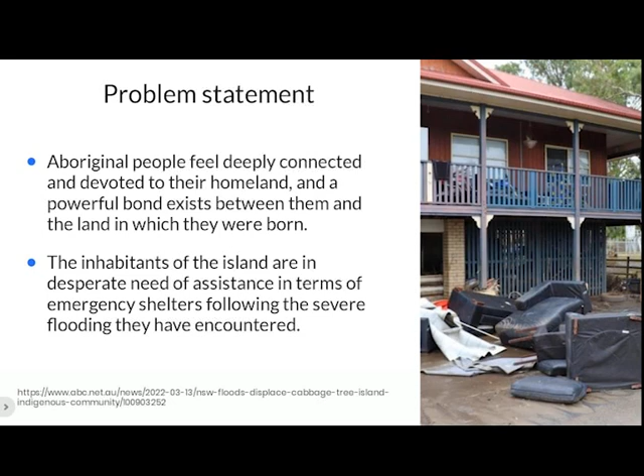Then we talk about the problem statement. First of all, the Aboriginal people have deep feeling for their homeland and are unwilling to leave it easily. Then after the flood, residents' needs for housing are the priority. This is what I want to solve by design.

Let's move on to the next page. I want to talk about frameworks. Using theoretical frameworks such as disaster risk reduction and the social-ecological system, along with methodologies such as

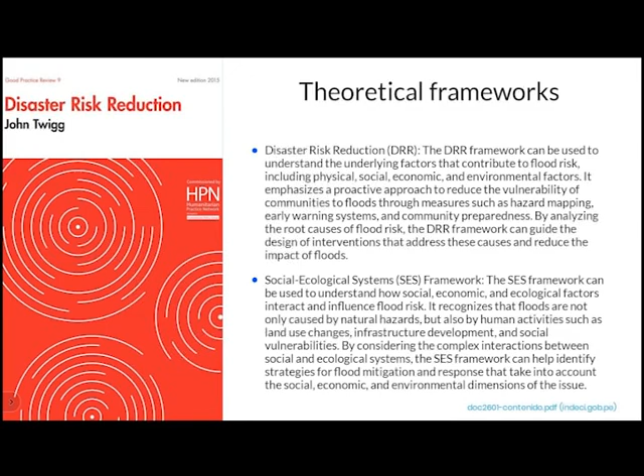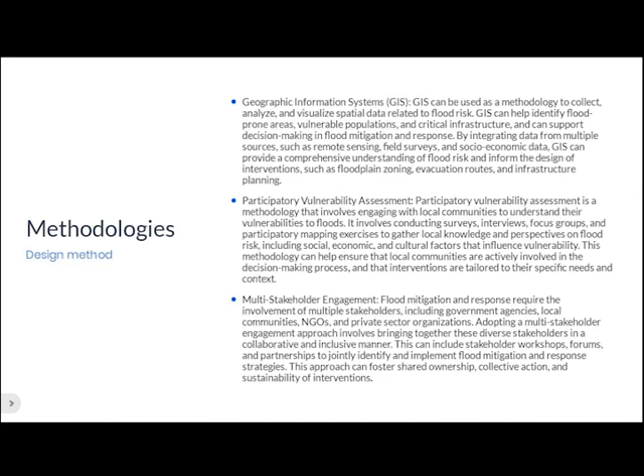geographic information systems (GIS), participatory vulnerability assessment, and multi-stakeholder engagement, can provide a comprehensive and inclusive approach to designing a solution for flood mitigation and response.

Humanihut is an established company that provides shelters in containers. Their projects are complete and well equipped for comfortable living, but there are also limitations.

First, the shelter may not be delivered to the disaster area immediately after the flood. Second, the container can only be used in relatively flat terrain. Third, the container is not suitable for flood-prone areas if it is close to the ground.

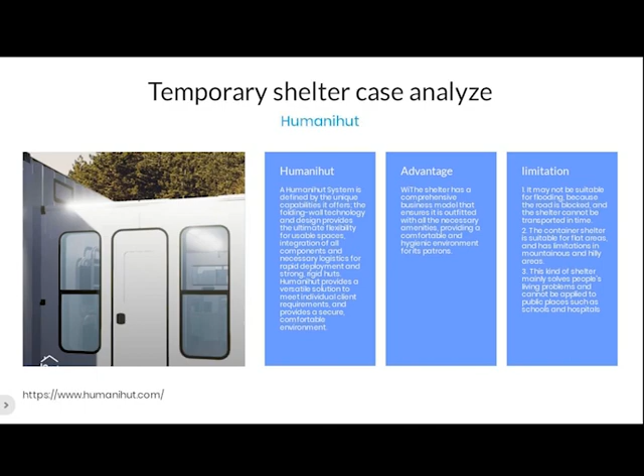Finally, the container shelter can only meet people's daily needs, and children in the disaster area hope to go to school as soon as possible. Let's move on to the next page.

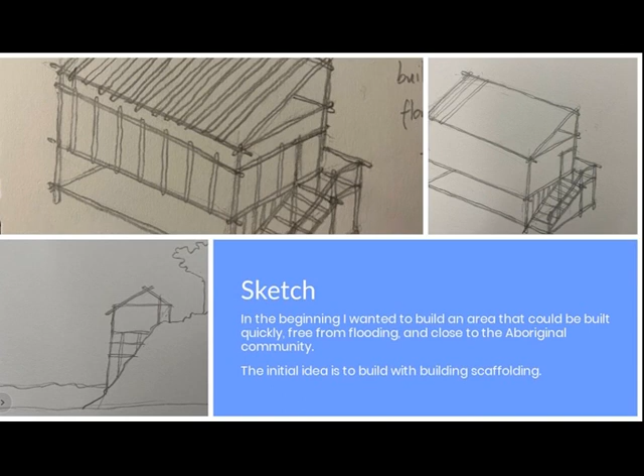In the beginning, I want to build an area that can be built quickly, free from flooding, and close to the Aboriginal community. The initial idea is to build with building scaffolding.

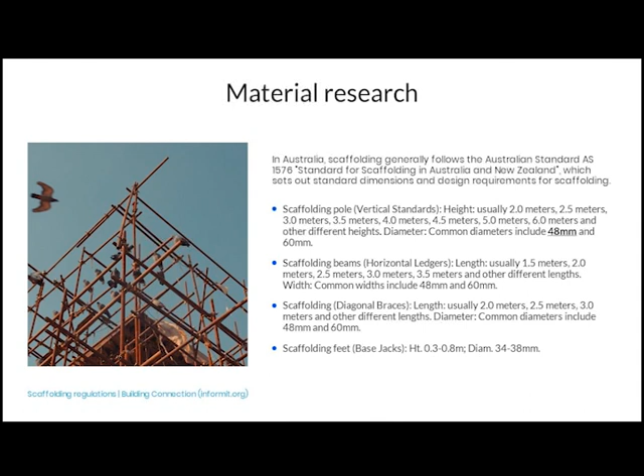Then I did some material research. According to the data, there are many kinds of specifications for building scaffolding. My idea is to minimize processing, saving money while being environmentally friendly.

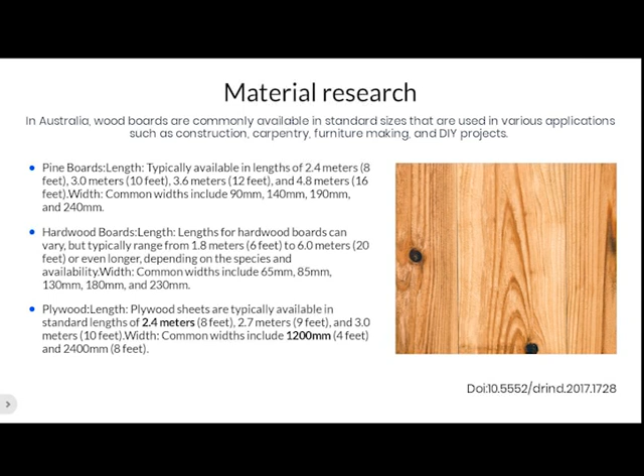In the same way, I investigated the standard size of some wooden boards and tried to use this material directly to avoid secondary processing. General scaffolding is easy to rust when stored for a long time.

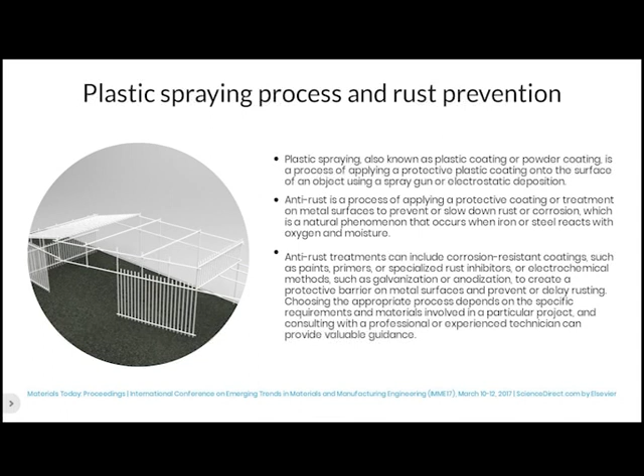So I investigated the plastic spraying process, which is more environmentally friendly and cost-effective than the electrolytic process. Therefore, the raw materials can be used after simple processing after purchase.

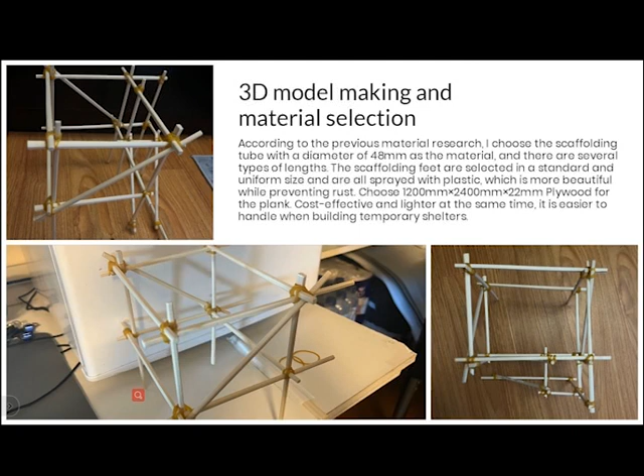After the material research, I made the 3D model and determined the size of the material used. I mainly consider the durability of the material, the comfort and environmental protection for people using it, followed by the cost issue. Then I made a further design and drew the blueprint of the shelter.

The reason why it looks like this is because the floods mostly happen in summer. I'm not worried about insulation, but more about dryness and ventilation.

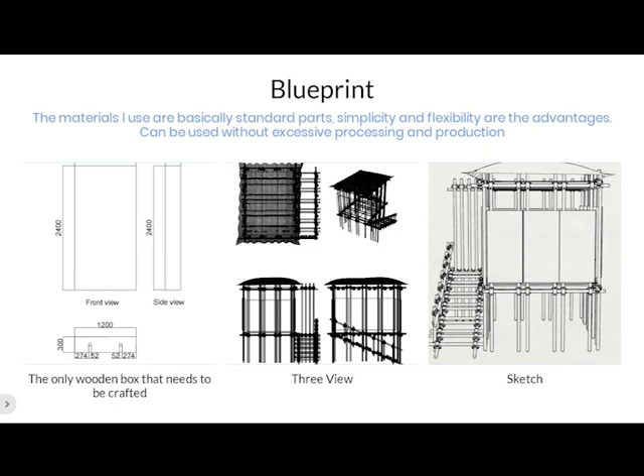The materials I used are basically standard parts. Flexibility is the advantage. The following is the assembly structure of my work, which is completely step by step, from simple parts, very simple and ingenious.

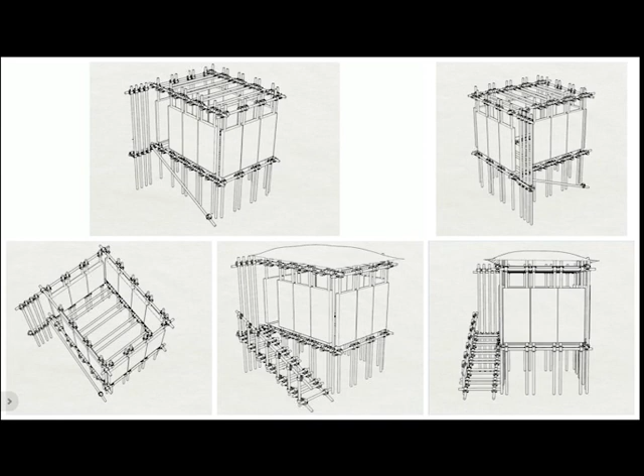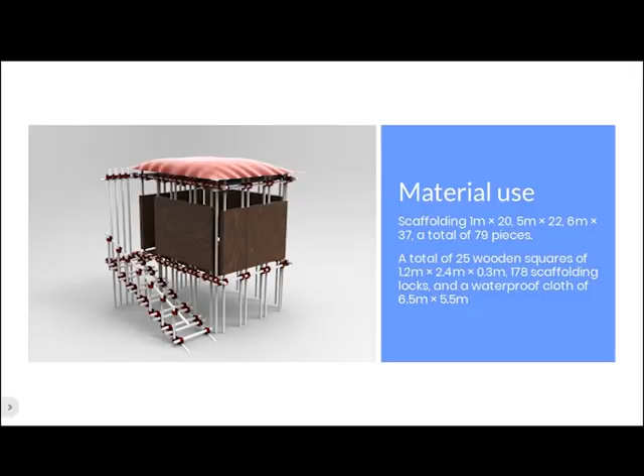The next page is the final rendering. I used a total of 79 scaffolding tubes, 25 wooden squares, and 178 scaffolding locks, and waterproof cloth. There are some different views and details of my work.

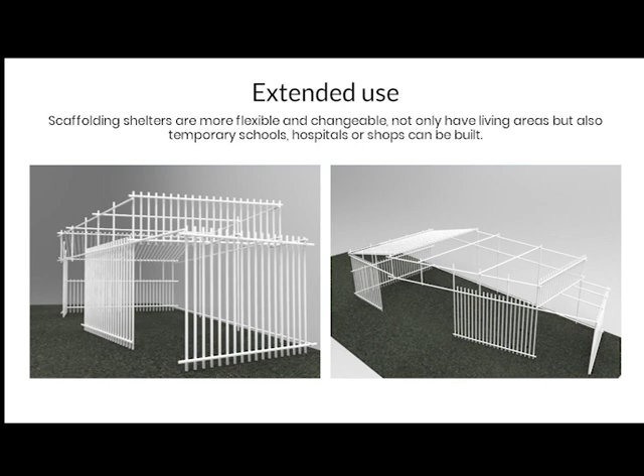In the end, I want to say scaffolding shelters are more flexible and changeable. Not only can they serve as living areas, but also temporary schools, hospitals, or shops can be built.